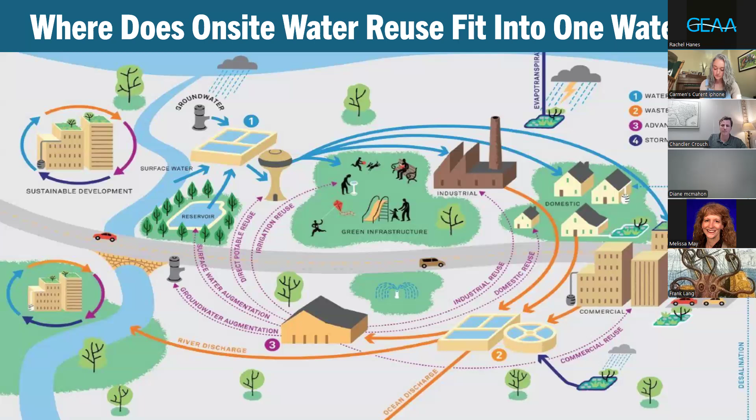So to define net zero water, this is a design approach. This is a design mindset for a building or for a site where they're going to prioritize use of alternative water sources other than the utility drinking water or groundwater wells to meet as many of their on-site demands as they can. The traditional supplies of on-site water that could be used for this type of strategy are shown here on the slide. They can be black water, which is the lowest water quality.

We'll talk about water quality in a few, but you've got black water, gray water, evaporative cooling blowdown, foundation drainage water, and then the more readily known stormwater, rainwater, and AC condensate. All of these are supplies that could be captured on site, treated, and reused. And we have research, we have evidence of systems like this in practice in the field at buildings that are operational and using these systems to offset their potable demands.

So they're still connected to a drinking water line from a city, but they're using these on-site sources for all of their non-drinking water needs. And by doing this, they've been able to reduce their demands compared to a typical building just using the drinking water line by up to 70%. So they've had over a 50% reduction in their drinking water requirements.

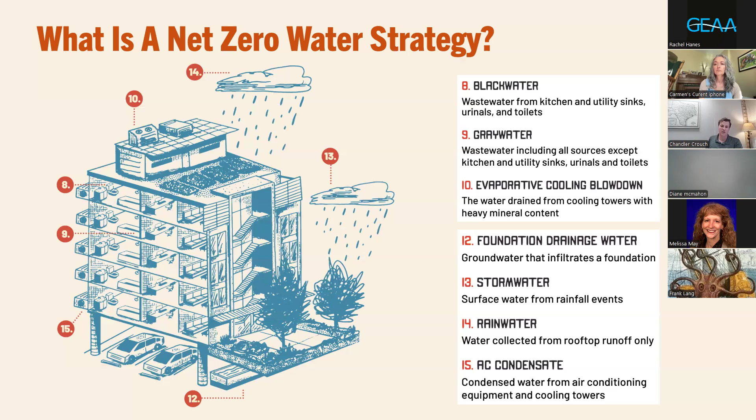And so we'll see some examples here in a few. So the next one we're going to look at on this next slide will be a building schematic that's using one of these systems, and I'll show how well this building is able to provide its own water, but also integrate with the One Water strategies of the city that it's in, as I mentioned previously.

So this is the Credit Human building in San Antonio. This building has been online for a couple of years now, and they're pulling data out. They just actually won a Blue Legacy Award from the Texas Water Foundation this year, which was awarded to them at a conference this spring in Austin.

This building design separates out its potable drinking water and non-potable water demands on site. So they have two different water supply lines in the building depending on the end use of that fixture. If it's a hand sink or a water fountain or an ice maker or a shower, anything like that, it's using drinking water. If it's toilet flushing, or outdoor irrigation, or cooling tower makeup water, in this instance at this building, it's using a non-drinking water supply line.

And what this allows them to do is integrate a collection system at the facility that captures rainwater off the roof and all of the AC condensate coming off of their air handlers. And they store that water in 130,000 gallons of on-site storage, which are shown by the blue barrel-shaped symbols there on the right side of the slide. And then they have a day tank, which is shown inside of the parking garage structure there at the bottom of the slide.

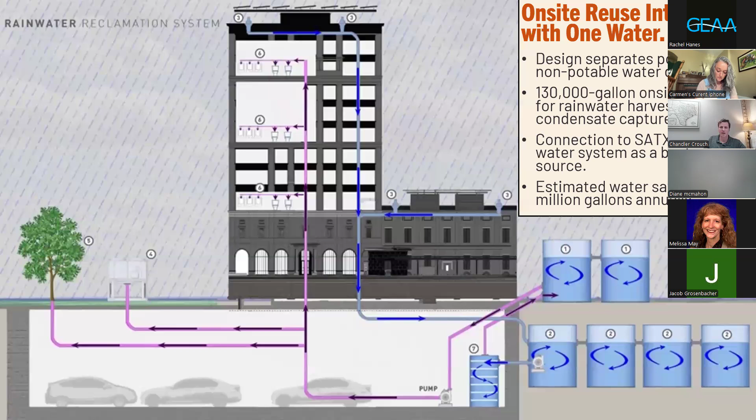So we'll look at one other example, which I imagine lots of folks have heard about at this time. A good institutional example I like to bring up is the Blue Hole Primary School out in Wimberley. This is a system that also captures rainwater and AC condensate. It uses that microfiltration and UV disinfection, a similar system to the previous example, to treat that water, and then they use it for subsurface drip irrigation at their athletic field. When they designed it, they expected annual potable water savings projected at 90%, which is just a huge reduction.

And what that tells you is that a lot of the water that these buildings are using is non-drinking water in nature. It's going to outdoor irrigation. It's going to water-cooled HVAC. It's not going to hand sinks, food prep, and showers. That's in this example at this school where you have minimal bathroom usage, unlike a house or a high rise, right? You only see 10% of that water that needs to be drinking water quality.

So some substantial offsets. In their first year, they were able to save 500,000 gallons, which is just 49% less than a comparable school based on the number of students and the square footage. Their projected 30-year cost savings is $724,500. So this system will absolutely pay itself off in the lifetime of the school. And the school has the benefit of knowing that they're going to own and operate this system for the lifespan of that 30 years, right?

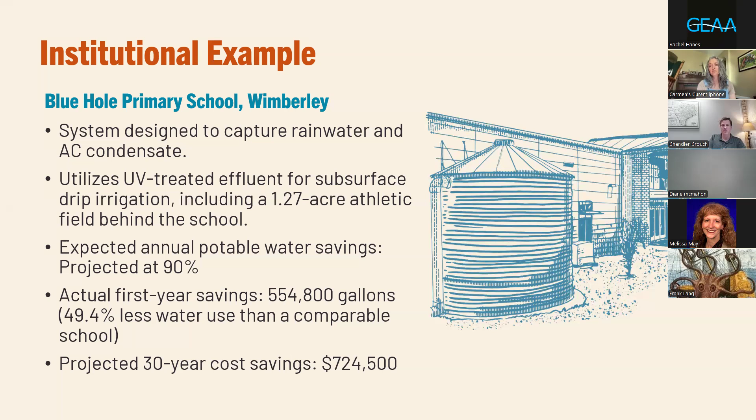So that's kind of a high to low, hopefully somewhat detailed for you, about where this practice of on-site water fits into the One Water story that I know is becoming popularized. A lot of utilities are taking One Water initiatives. So that's kind of where it sits. It integrates. It's not operating in a silo. It's not counterproductive. It integrates with the One Water efforts of a whole area. And so now we'll look a little further at how we go about calculating the benefits and understanding the benefits of these systems, and how we go about designing them and selecting them as they go into projects.

So when we start to look at these types of projects, we start with looking at kind of a theoretical supply and demand curve for a project, right? So say a project wants to come online and they'll sum up all of their fixtures and all of their anticipated water demands at the site, and they can sum them up across a year by month. And I've got that shown on this slide in the bars.

And so you can see we've broken out all of the different types of water demands in those bars on this chart based on the type of demand. Is it potable? Is it drinking water? Is it hand sinks and water fountains? Is it cooling demands? Is it going to the HVAC? Is it outdoor irrigation demands? Is it indoor non-potable demands like perhaps indoor toilet flushing or process water at a manufacturing facility?

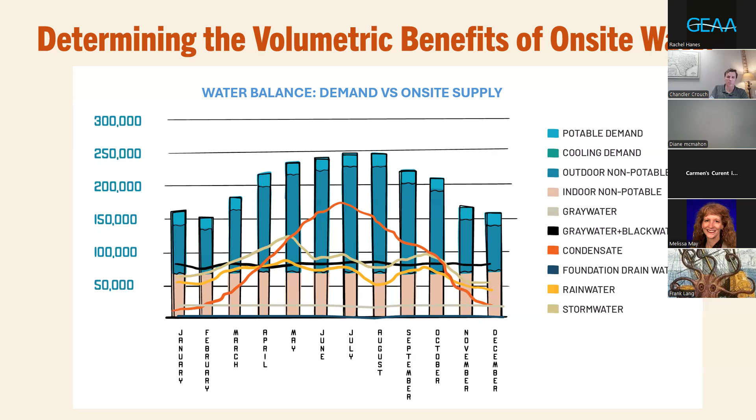And so this is kind of a subjective process that is worked through with your designer, your engineer, your owner's rep to figure out what's going to be the right curve, the right nexus between cost and payback and water offset. And so that's kind of the practice that we go through when we're starting to think about applying these projects.

The next thing we want to think about when we're choosing the right sources is health and safety, right? First and foremost, we want to protect public health. I like to start by looking for on-site water sources, beginning with the highest water quality and moving downward as needed. So we start by looking at our source water quality tier list, which I've got here shown. Highest quality water is going to be coming straight from our utility. That's going to be our drinking water.

The next highest quality and trending downwards is going to be our condensate recovery from our air conditioning coils, because that's effectively distilled water out of the atmosphere. Rainwater, evaporative cooling, foundation drainage, if we have that. Not too often here in Texas, but it's worth mentioning. Stormwater, gray water, and then finally at the lowest water quality, black water.

And so, a lot of these projects can have a lot of success in offsetting substantial amounts of their water working from top down and starting with the easiest to manage, easiest to capture, store, and treat and reuse, the most cost effective. And so that starts with the highest water quality and working downward. There's additional costs, complexity, and regulation as we move down the water quality hierarchy, especially once we get down to black water. Those are the most complex and the most challenging to get permitted, installed, and operated.

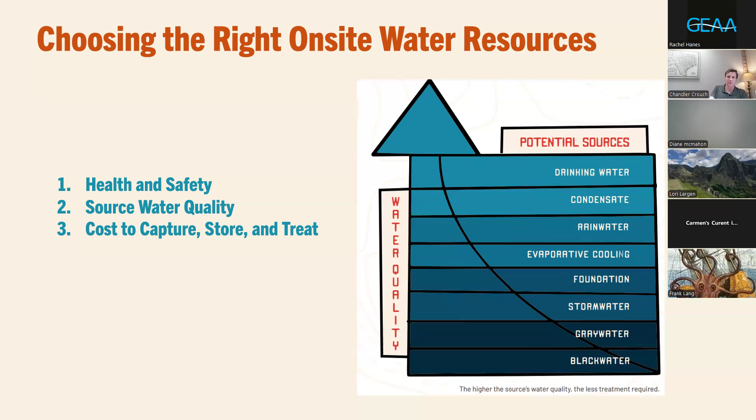And so if you're going to move in a direction like that, you're hoping to see substantial offsets. You're hoping to see meeting potentially all of your water demands through using that source. So those are not the most applied. I would say you start with the highest water quality and work your way down and see where adding those together, those conjunctive supplies can get us and what we can start to offset. So health and safety, source water quality, and then the costs to capture, store, and treat. Those are the next items we think about when we're working on these projects.

I mentioned treatment, and I wanted to give a few examples to show the range between these types of systems. So I've got two example treatment chains here shown on this slide. And while they may look fairly similar, and they have maybe some overlapping components, there's significant cost and complexity between the two. For example, on our top example, we see AC condensate and rainwater harvesting and use for spray irrigation. So in a system like this, we may have a first flush diverter, a storage cistern, a cartridge filter for filtration. We then might use a UV disinfection. And then that water is effectively a high enough quality for outdoor use, where it's going to have minimal contact to the public.

If we move, as I mentioned, down to black water, we've got an additional item there, which is just shown as one of those squares called membrane bioreactor, which is just one of many available options to be able to treat black water at a small scale on site, but which add significant complexity and permitting requirements through the TCEQ. Whereas if you're staying in the higher quality waters, there's far less requirements. Not saying that is an excuse for putting the public at risk. I will always still advocate for high water quality standards and testing.

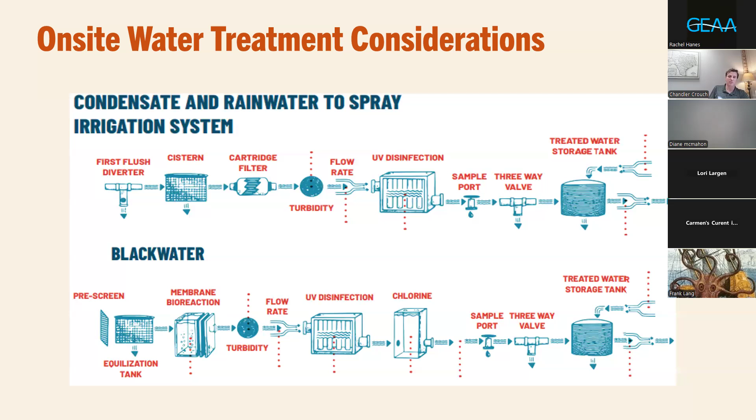And then lastly, as we're thinking about these systems, we also want to think about reliability, especially with those seasonal supplies. As I mentioned, the rainwater and the AC condensate, being kind of the lowest hanging fruit, are also the ones that are really dependent on the season and the occupancy and use of the building. And so when we look at those two supplies, we want to make sure that we are sizing our on-site storage appropriately to minimize costs but maximize the reliability of these sources. And so we can actually build a curve using reliability models based on factors like precipitation data for your area, historic data, catchment area, and your average daily demands, your projected demands that you want to try to use these systems to meet, and we can build a curve.

And there's often, as shown in this line, you can see there's a break-even point, right? Where all of a sudden adding additional storage, which is shown on the bottom of the chart there, isn't netting you all that much more reliability shown on the vertical axis. So you want to kind of find that sweet spot.

In this example, I think this was a single site that has 70,000 square feet of capture area for a rainwater harvesting and AC condensate recovery system. And the break-even point for them was right at 110,000 gallons of storage, which would net them an 89% reliability. And that doesn't mean that 89% of the year it's reliable. That means that for given demands in these theoretical supplies, any given year has an 89% likelihood that the on-site storage and supply will fully meet those demands, right? So that's, I would argue, fairly high reliability.

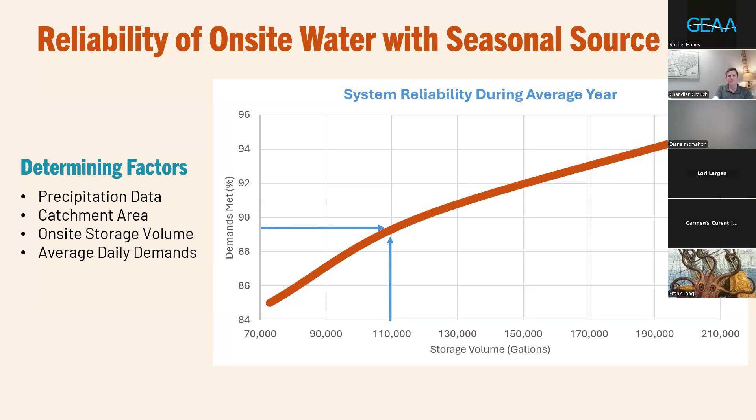And so here we go into our last section. I think this is one of the most important ones for the practice of on-site water and reuse and the net zero design approach that we've been talking about. And this is impediments to that. We've all heard of these ideas. We know rainwater harvesting's a generally good idea. We know it's been proven academically to be reliable.

We have studies coming out of the Meadows Center at Texas State showing that there's firm yields that can be provided by these supplies, and we know that they can offset valuable potable drinking water, so that we can allow for more growth without totally over consuming and overstraining our traditional supplies and running our aquifers and our surface water reservoirs to the dry limit. But why aren't these types of systems being more readily used? What's holding them back if they're that good of an idea, if they're proven to be reliable?

I think I'll walk through a few of these impediments. One of them, I argue, is system design expertise. These systems, while they are not overly complex, do have enough complexity that they can't be left poorly designed, expecting a contractor to install them appropriately. Oftentimes, you could see on a schematic for a building, you've got a site map and you've got a building footprint, and somebody just draws a circle for a rainwater tank and says, hey, put a rainwater tank here. They draw a line to the corner of the building and they say, connect to the gutter.

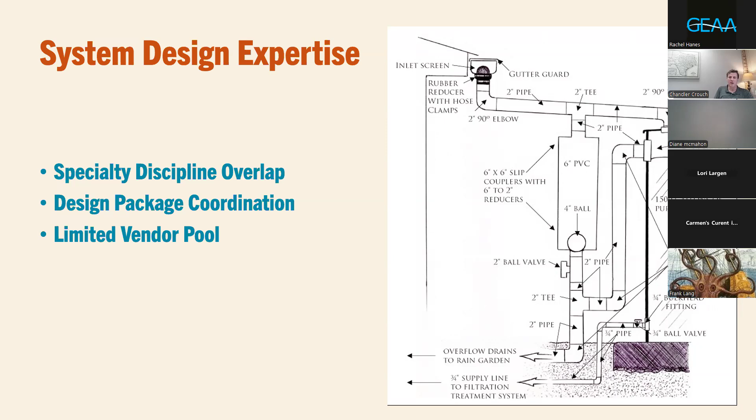Let's just turn it off. I don't know how to fix it. And all of a sudden, all that hard work in design and construction is now just going to waste because the on-site staff doesn't have strong integration with how to operate these systems. So we've got limitations there to the design, the install, and the operations. So big impediment there. These systems are not set and forget it. That's what I was alluding to in the last slide. They do require ongoing operations and maintenance.

Anybody listening who has a rainwater harvesting system knows, hey, after the spring and fall tree leaf drop, I've got to go out there and scrape the leaves off my gutter, scrape the leaves out of my catch filter at the top of my tank, and make sure that I'm still getting flow into and out of the system, right? And so it does take some O&M to make sure these systems are operating correctly.

I showed you UV disinfection on those last ones; somebody's got to be able to change that bulb, right? That UV light bulb has a life expectancy of maybe 50,000 hours, but it eventually will burn out. And if no one replaces it, then the system's not working as it was designed. So we've got to make sure that we're educated on how to operate and best maintain these systems. And so, as part of that, we need training and accreditation. We need a credential for operating these systems.

And so the City of Austin, their Austin Water Utility, is actually in the process of working with a national organization called the Blue Ribbon Commission to develop a training manual and test to get a credential. It's a certification, not a license, to be able to operate these systems, to understand that full range of those on-site sources that I mentioned up to blackwater, right? Because we know that has to be operated by a licensed operator, but everything underneath that, how do we go about maintaining those systems? And so we're hoping that we can create a market of interest.

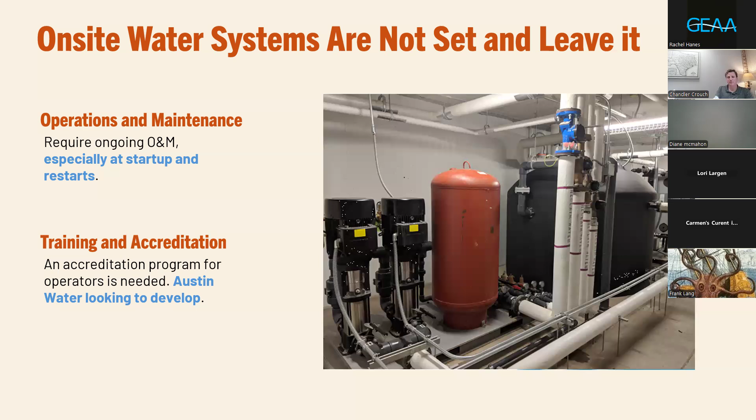Additionally, we've got financing impediments. These systems may only represent a few % of a total project budget, but they're costly enough that they can often get value engineered out. They can get designed out of the project since they're an additional cost. And there's not yet great vehicles to finance these with low interest loans.

Other water projects developed by utilities and cities are backstopped by ratepayers who are purchasing the drinking water; those rates are used to service the capital, to build additional infrastructure, to grow our traditional water supplies. These on-site water systems don't have a payback mechanism like that. Once they're online, they're providing a benefit to a building. The only financial savings you're immediately seeing is the savings from your water bill, right?

And so yes, you're saving water and you're saving on your water bill, but that economic savings might take 30 years to pay back $100,000 for the cost of this on-site water system. So we're still looking to identify more ways to unlock low interest financing so that the purveyors of these projects don't have to shoulder that capital burden alone. They can get a low interest loan that allows that water savings to service the debt that pays for the system, just like at a centralized level.

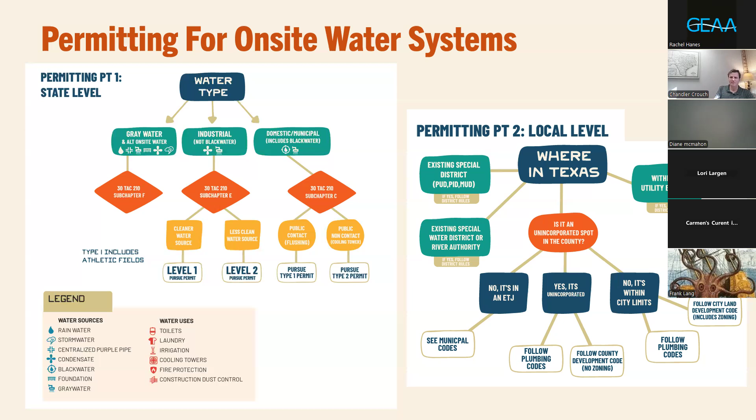This is just a little tree showing all the pathways you might get on. And I recognize I'm absorbing a lot of time, so I'll run through these last couple of slides. Regulatory opportunities: if you're interested, check out SB 1289. That just came online in 2023. That unlocks sewer mining, where a site can pull water out of the gravity system, the centralized city system, treat it on site, and reuse it for outdoor irrigation.

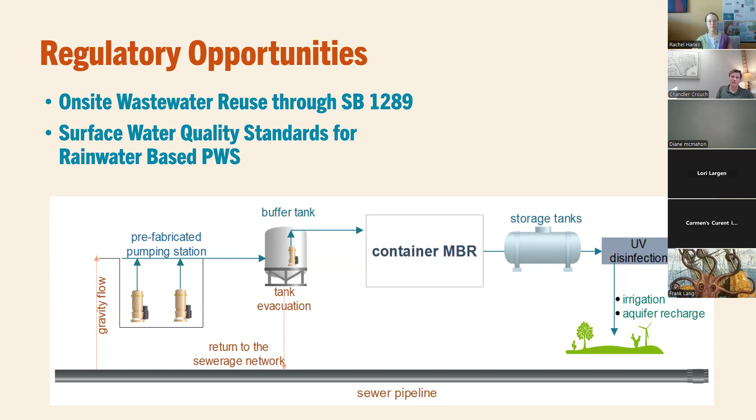And then there's also opportunities for rainwater systems to become public water supply systems. This applies out in rural areas where you don't have a utility to provide water to your site and you don't want to use groundwater. There's currently only one permitted public water supply system that solely uses rainwater, and it's in West Austin at Shield Ranch. So if you're interested, check that out.

Lastly, certifications. We'd like to see more of these. There are a few out there like LEED. LEED has just launched in 2020 a net zero water initiative. They have net zero energy, net zero carbon, and now net zero water, where they look at a water balance of a site and they determine if you are using more alternative water, so more of all the on-site supplies we talked about, or even the municipal reclaimed water, more water other than drinking water, they'll call you net zero.

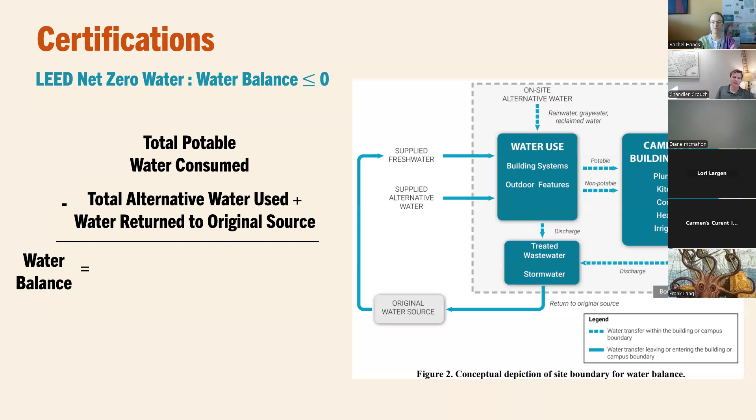So you don't actually have to zero out or net out where you're not using any drinking water, but as long as you're using more of another source than the drinking water source, they're willing to call that net zero. So that's an interesting certification that's come online here recently that buildings can apply for. And so far, I've really only seen this utilized at developments that are already going to be pursuing other LEED goals, LEED certifications. But opportunities there, and we'd like to see more of that.

So in closing, we talked all about on-site water, what it looks like, how it can be thought about and implemented, and what's holding it back. We know it's an important component to the One Water approach. We know it can provide substantial volumetric offsets when reliably designed well and installed and maintained well. And we know that there are impediments continuing to hold it back that we walked through here in this last section.

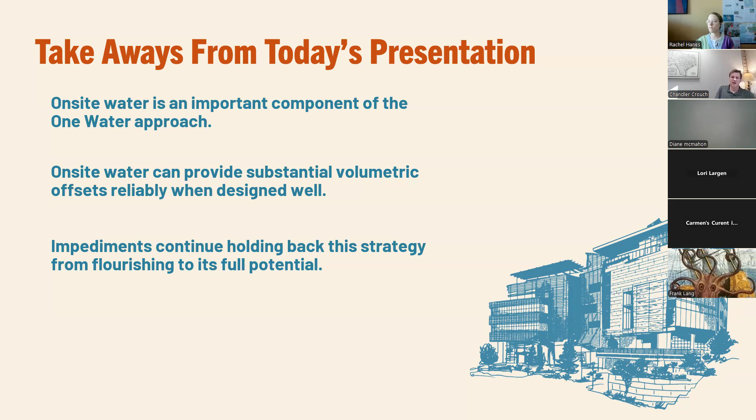That was sponsored by a few entities, Austin Water, Aquacel, and LCRA. So we're really happy with how that turned out. Please do check it out. It's fairly graphical in nature, so it's dense, but it's absorbable.

And then lastly, my role as the net zero water engineer is to just lower barriers of entry for these projects. So I can help in technical support for decision makers. I can help in analyzing what best options and recommendations are for these types of projects. I can help with pricing estimates and permitting analysis, and I can provide treatment and monitoring recommendations.

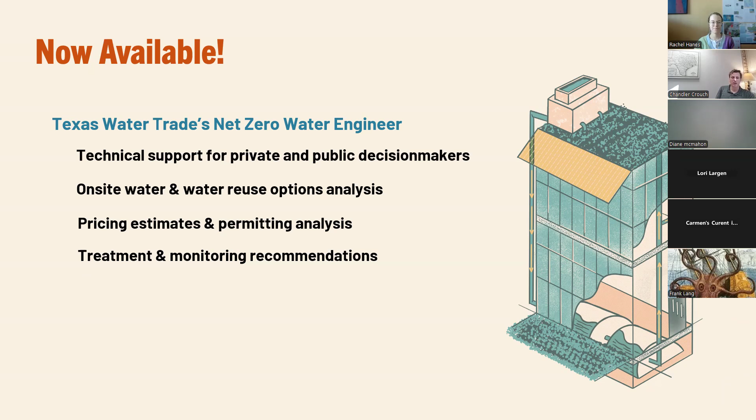And I provide that whole suite of options to try to just get more of these systems online in hopes that as more of these on-site water systems come online, the benefits are realized and the market adoption replicates. That's really our target goal with this program at Texas Water Trade.